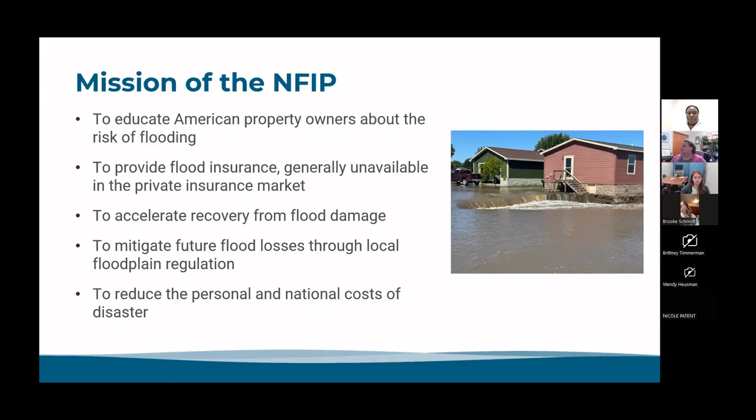So why do communities participate? Firstly, flood insurance, as I mentioned, is required when a structure with a federally backed mortgage or loan is in an identified floodplain, which can be difficult to find through private insurance. The insurance available through the NFIP is at a discounted rate. It can be found almost anywhere in the country, and it's easy to pay out because it's federal money.

Even if you have a bunch of claims, especially when a flood happens, it usually affects a lot of people, and private insurers are unable to pay out those claims. But for the NFIP, because it's federal money, they're usually able to pay out. There's also decreased liability, since an active floodplain management program reduces risk to life and property, and then also flood mitigation.

By mitigating flood damages before an event occurs, your community can recover faster after an event. That's the purpose of the regulations in your ordinance. So if a new structure is coming up, it has to follow the regulations to make sure that structure is mitigated against flood damages.

And then there's federal disaster assistance: communities not taking steps to protect their infrastructure and future development may not qualify for certain forms of federal disaster assistance, because again, they want to make sure that structures at risk are protected. If you're not enforcing those regulations, then you will not have access to federal disaster assistance.

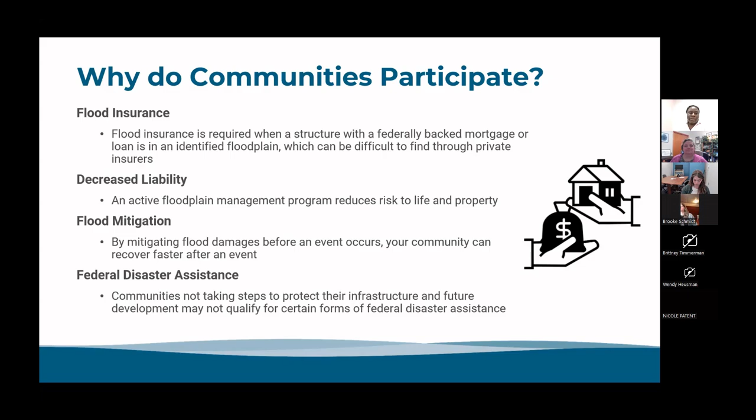So what is a floodplain administrator? I'm sorry.

The floodplain administrator is the individual in a community tasked with implementing the floodplain management program. So most of you have this role. It is an assigned title within the local ordinance. It can be assigned to any recognized position within a community. So you may be a floodplain administrator, but you're also a clerk. You may be a zoning administrator, emergency manager, planner, etc. It may also be contracted to an external person or group.

No minimum training is required to be an FPA in Nebraska. So the only training that you usually get is through the classes that we provide here at the agency. Or if you would like, some go ahead and get the CFM, which is a test that you take to become a certified floodplain manager. But that's usually not required unless your ordinance or your community requires it for that role.

So the floodplain administrator acts as the community representative for all things floodplain. This includes acting as the floodplain permitting officer, the ordinance enforcement officer. The enforcement authority lies within the community. Whenever a floodplain administrator signs a permit, that becomes the official permit, and so the enforcement authority is on the community. We at the agency do not have any enforcement authority.

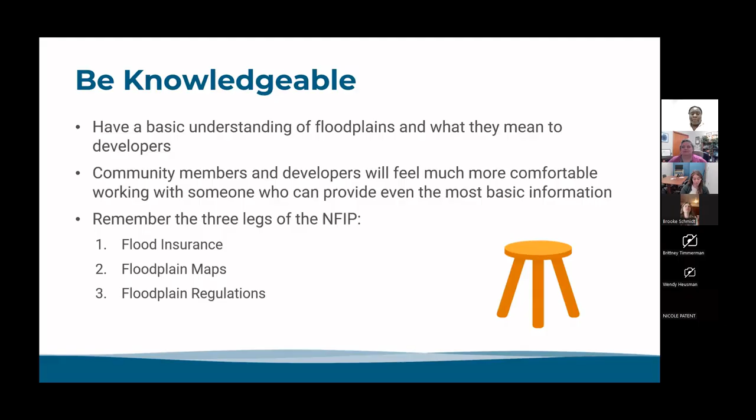So as long as you at least know a bit of this, or you know who to go to ask, then you're on the right track. But it's always a good way to

Be knowledgeable in that way. You can also know your community. Communicate with community members within properties in the floodplain. Remind them that flood insurance is available. Provide your contact information and always be available for questions. There'll always be a lot of questions about floodplains because people still do not understand what floodplains are. So you are the local contact person that they can learn about these things. Talk with your community members about their experiences too.

Next is know your responsibility. Review your floodplain ordinance. If you do not know where your floodplain ordinance is, or you do not have it, you can always contact us and we'll either help you track it down or help you draft a new one. Your local floodplain ordinance has got all the regulations needed to administer your floodplain management program. It also highlights the permitting section. It lets you know how to build, design, and all that. It also lets you know if you've got higher standards or anything associated with floodplain management. So you don't necessarily have to know the entire ordinance, but at least know the permitting sections and what your responsibilities are, which are all laid out in your floodplain ordinance.

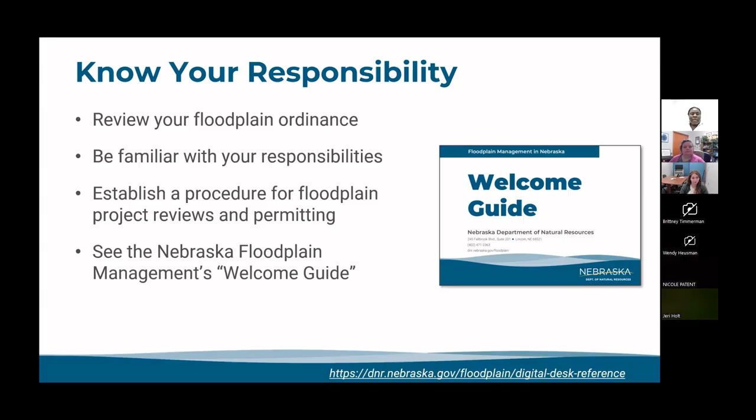Secondly is know your floodplain. Be familiar with your community floodplain maps. A great way to do this is using our online interactive maps or your flood insurance rate maps. The interactive maps can be found at our website, and there should be a link here somewhere where you can click on it and get to the interactive map. You put in an address and you're able to see where your floodplains are.

Or you can use the flood insurance rate maps, which are the FIRMs. You can find these at the FEMA Map Service Center. You can also download them and have them as copies in your office. Know what houses and businesses exist within the floodplain. That's a good way, and this also helps when you have a disaster, so you know how to go about the substantial damage and substantial improvement assessments.

Learn about past flooding events within your community. Again, the resources are the interactive map, the FEMA Map Service Center, and the State Flood Hazard Mitigation Plan for info on past flooding events. All this can be found at our website.

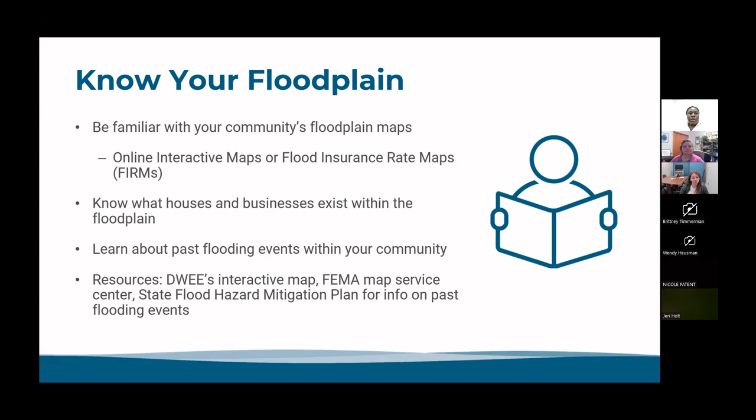And then we're going to go into types of floodplains. There are many types of floodplains representing different flood risks. When you open the interactive map, this picture here is basically what you see, depending on the level of regulations that your community has. The zones are identified by letters and numbers, from zone A to zone A99 to zone X. Some are regulatory, others simply indicate risk.

High risk are the regulatory ones, which are zone A, zone AE, zone A1 to 30, and zone A99. And then you have moderate to low risk—these are shaded zone X and zone B and C. I'm going to go into details on all of this in the coming slides.

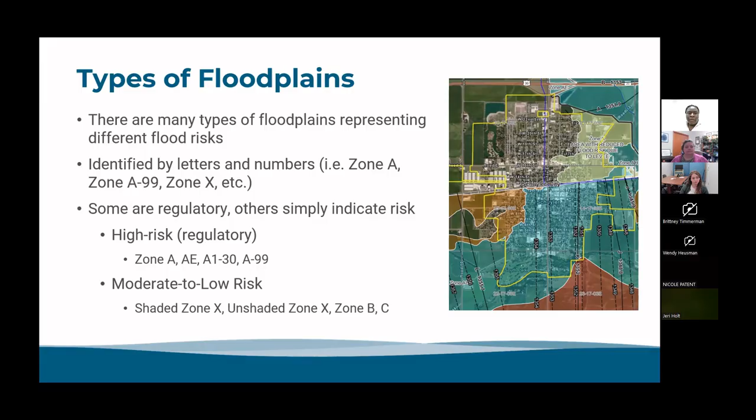The easiest way to find a floodplain in your community is to explore the Nebraska Floodplain Interactive Map. There is the link to the interactive map, and that is what you will see when you go to that interface—this is probably the first page. You have the blue blob, which is the regulatory floodplain, and then you have the community boundaries, which are usually in yellow, and if you have a floodway, that will be in red, and this yellow box is usually if you have a BFE determination in that section.

So yeah, our interactive map is very helpful. We've done a class on this. If you go on a training page, you'll be able to find that class there, and it will help you navigate the interactive map.

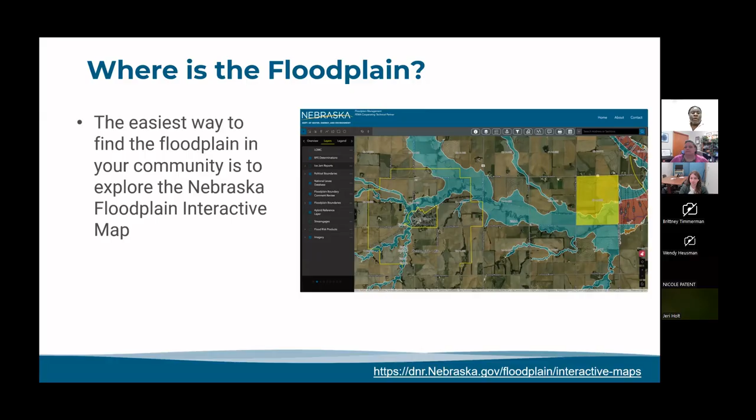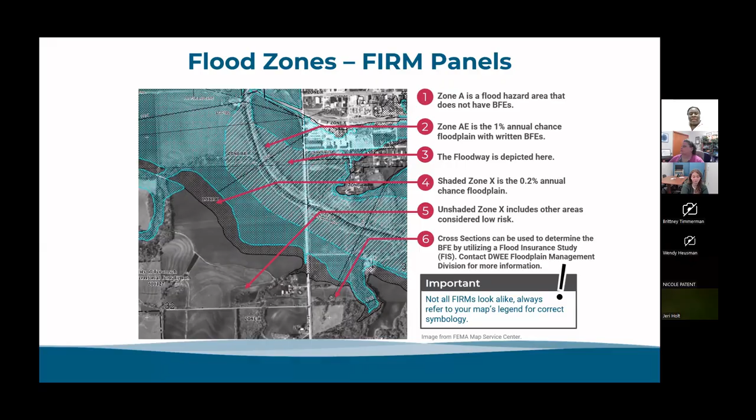And then Zone AE is the 1% annual chance floodplain with written BFE. So where arrow number 2 is pointing, that is Zone AE. Zone AE and Zone A really look alike most of the time because they're all blue blobs, so you have to look at the actual writing to tell if it's Zone A or Zone AE.

Arrow number 4 is the shaded Zone X, which is the 0.2% annual chance floodplain. And then arrow number 5, that will be the unshaded Zone X, which includes other areas considered low risk.

And then finally, arrow number 6 points to the cross sections. That's how they will look like on your interactive map, and this can be used to determine the BFE by utilizing a flood insurance study.

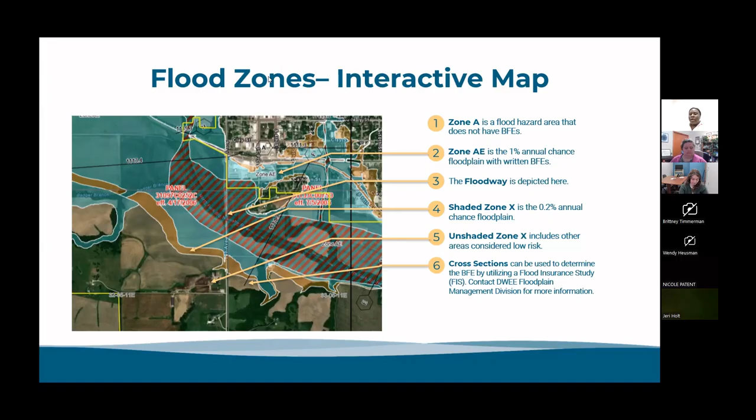Next is being understanding. A floodplain permit is likely not the only document that they're working through to complete the project. As we all know, when somebody is doing a building project, there's a lot of parts going through and they're trying to figure everything else out. So be understanding that they are probably already in a stressful situation. And regulations are really, really hard to understand, especially if that's the first time you're hearing about them. So approach it with an understanding view.

Be available, and if needed, let them vent. Sometimes people are really not mad at you or upset with you. They just really want somebody to listen to them, and you can be that person for them and let them vent, let them tell you what they're going through.

And then you can also use our office or FEMA as the bad guy. You can be like, hey, these are not my regulations, these are the FEMA regulations. We just have to follow them, and this is what they provide for us. So we're always good to be used as the bad guy. You can always use us. And remember, we provide technical assistance, but we are not an enforcement authority for your community. All the enforcement comes through your office, and we only provide technical assistance.

So difficult situations can mean a few things. It can be meeting project timelines, extra financial expenses for floodplain compliance, general unfamiliarity with floodplain regulations, and for some, understanding the regulations may not necessarily mean they plan to meet them. So this is the basic understanding of what a difficult situation would be for a floodplain administrator.

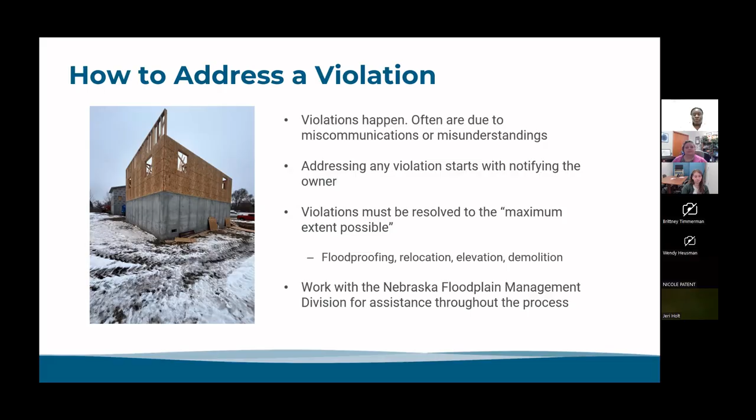But if there is no communication and it's quiet and nobody's doing anything, that's when we move that violation up to FEMA, and they have enforcement authority. And so that is not what you want. So what you want is to work with us so that you can help your community member solve that violation, and that it's brought into full or partial compliance.

If the owner is the problem, inform the owner of the violation through an official notice on community letterhead. So we do have templates of this here.

And so if you need to use a notice, which is the last stage, after you've tried talking to them, after you've maybe given them a call, especially for small communities, if you know the person, just give them a call and say, hey, we need to get this done. Because sometimes when you just send a violation notice, people go on the defense already because that's official, and they're like, oh, well, I'm going to have to inform lawyers and things like that. So sometimes a violation may get out of hand when it really doesn't need to. Sometimes what a violation needs is, hey, we just need you to sign a permit, or we just need to permit this.

Or for example, there was one person that had a shed in the floodplain, and they didn't really know about the regulations, but it was considered an accessory structure, and so they needed to have flood vents in it. And so it's a structure that's already done, it's already been put in place, and we're telling them, hey, you have to make this compliant by putting holes in it. And so if that community had just sent a notice letter letting them know about that, they would have been on the defense. But all they actually needed to do was just put the flood vents in there, and the person already even had the flood vents. They just didn't want to put them in because they didn't look nice. And so it wasn't even an issue of, hey, this is a big violation, just, hey, we need you to get this in. And it was a matter of a day and they got those in.

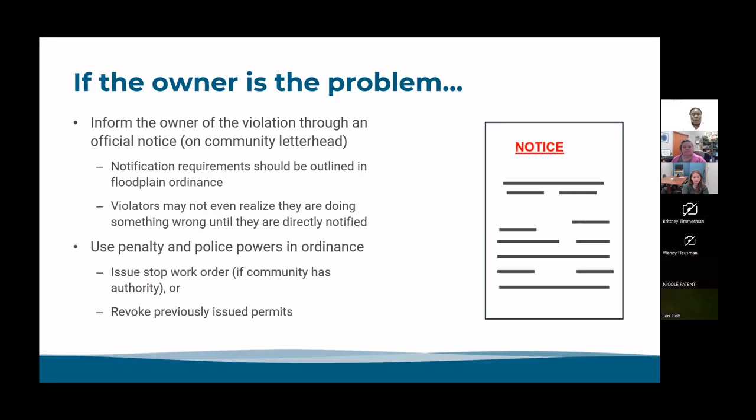Violation notices should include a description of the development, an explanation for why it is a violation, references to the regulations the development is in violation of, and then next actionable steps. This is a really good way to get a violation done if you have next actionable steps. Like I mentioned, having an action list is really good. You keep a copy, they keep a copy, you can send us a copy so that we know and we can track progress like that. And once they start checking those things off, it seems a little bit easier to do than having this huge violation in front of them.

A time frame for response is usually really good so that you can do check-ins and updates. So maybe you tell them, hey, let's do this in 3 months, and I'll check in every month to see if you've gotten things in order. Do you have the permit? Have you done this or that? Have you had surveyed elevations and things like that? So having a time frame is usually really good.

If your entity is at fault, so if the problem is with your office, the community must notify the owner of the violation. So let them know, most preferably call them before you send a notification letter. Discuss remedial actions with the owner. Let them know what they need to do and how they can do it if they don't know how to do it. If you have any questions, you can always call our office and we would help you navigate through that. Explore all practicable remedies. So don't just tell them it's a violation. Let them know what they can do to remedy these actions.

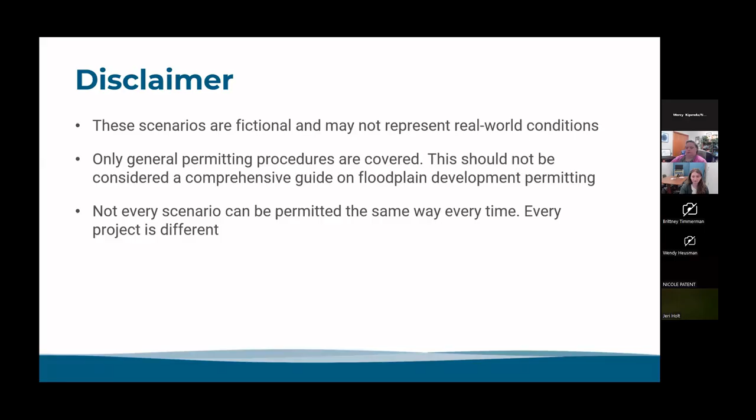To give an overview of the general permitting process and its steps: step one is the project proposal, where the applicant or property owner brings the project to you. Step two is the floodplain development permit application, where they fill out their portion. Step three is the floodplain administrator review of the application, where you check all the information. Step four is where you make a decision.

The FPA makes a decision on the permit. Step five is project monitoring, making sure they're not doing anything outside the scope of the permit and still staying in compliance. Step six is post-construction proof of compliance. We'll go into that in more detail, but those are the general steps of the permitting process.

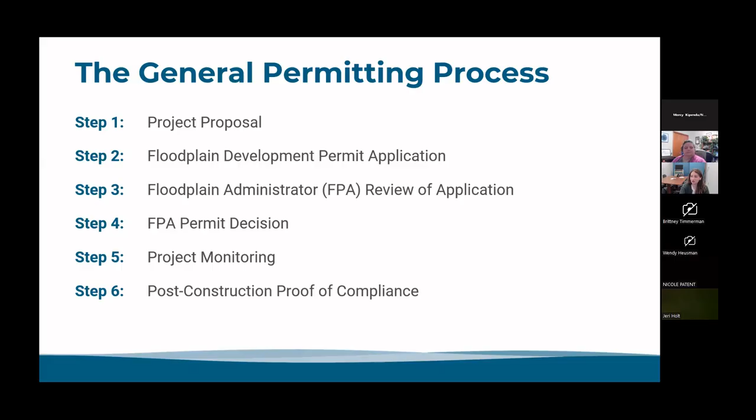So scenario one, also step one, project proposal. A property owner submits a floodplain development permit application to the local floodplain administrator proposing construction of a single-family residential structure on a parcel they own. The proposed structure is a two-story wood frame home with an attached garage. This is probably unrealistic to a lot of you, as most people don't just bring floodplain permit applications to you right away.

Typically, especially within smaller communities, they will apply for a building permit, and through that you find out they're in the floodplain and need the permit. But this is an ideal world scenario where they are already aware of the floodplain development permit and submit an application to you.

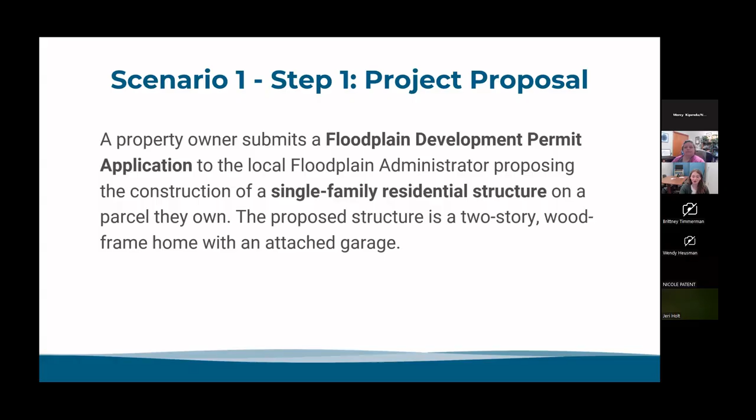So step two is that permit application. You want to read through the entire application. As you can see, we're using our model permit for this scenario and all the other scenarios. Yours might look different, but we wanted to use our model as we think it creates a good process and lays out all the information you need.

Once you have the location, which is on 123 Range Street, you will go to either your FIRM panel, or probably easier, our floodplain interactive map viewer, just to make sure you know what zone it's in, and that they're doing everything correctly. This blends into the review of the application. Here you can see the location of the project, that red pin on the image. You'll want to note the flood zone — it is a Zone A. So this should start getting your gears turning, thinking about what is required for residential structures in A zones.

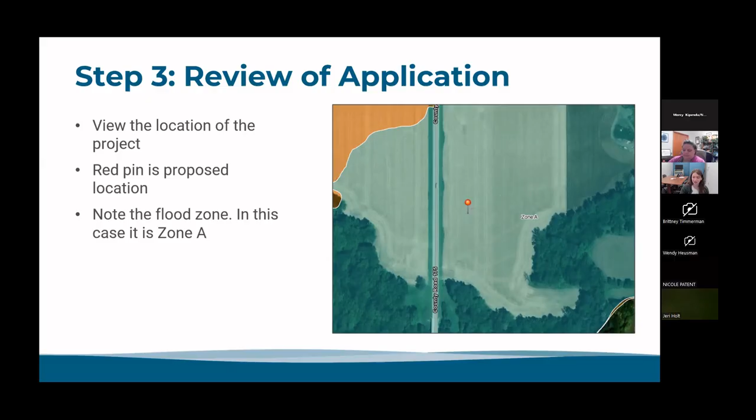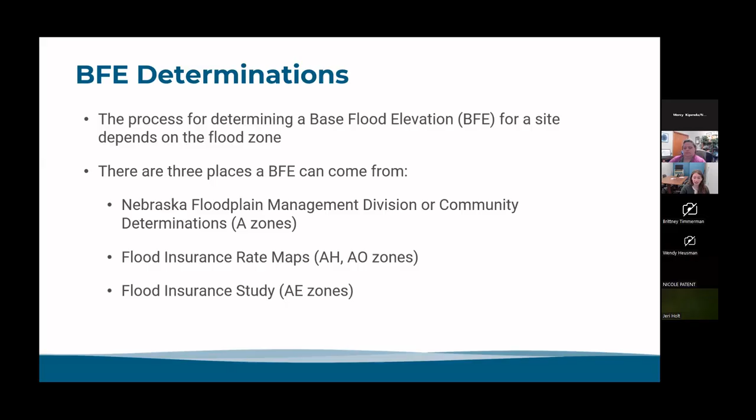One of those things is a BFE determination, a base flood elevation. The process for determining a BFE for a site depends on the flood zone. As noted, ours was Zone A, but there are three places a BFE can come from: us, the Nebraska Floodplain Management Division, or a community determination, which applies to A zones; from flood insurance rate maps for AH and AO zones, which will say however many feet above the grade; and flood insurance studies, which are for AE zones with floodways.

So again, we noted it as an A zone, so we contacted the Nebraska Department of Water, Energy, and Environment, Floodplain Management Division, and got our BFE determination, which is on the right there.

You'll see there's a bunch of little wavy lines, which are essentially cross sections. You will find the location of the project and check what two numbers are around the project, since typically a line doesn't run right through your project.

In our example here, the elevations are 1322 and 1321. When it comes to this A zone development, you will always go with the higher number as the BFE, since you can't interpolate between the two numbers. You can't say, well, that looks about halfway, so it's probably 1321.5. You don't do that when you're doing A zone BFE determinations. So you'll just go with the whole number of 1322 as the BFE.

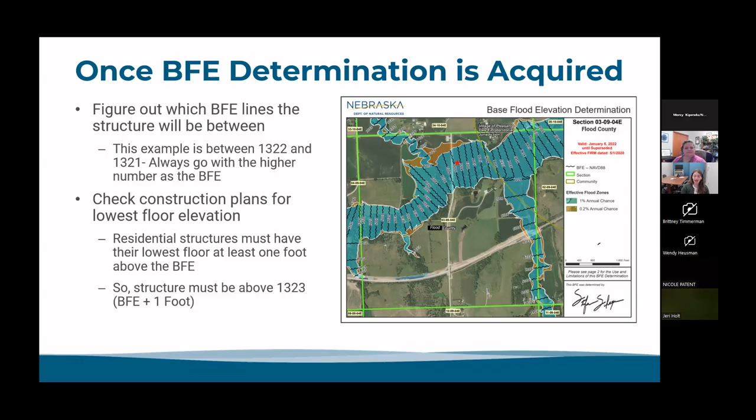So after you have that BFE, you'll want to check construction plans for the lowest floor elevation, because as a Nebraska state standard, residential structures must have their lowest floor at least 1 foot above the BFE. So that lowest floor for our proposed structure must be at or above 1323.

There's other required documentation for A zone development. A less than 1 foot rise determination is needed. This doesn't have to be an entire hydrological analysis by an engineer, but it could be if you want to require that. It's up to you on how in depth this less than 1 foot rise should be. This just means that the proposed construction won't cause 1 foot of rise in the base flood anywhere within the floodplain, not just the immediate surrounding area, but the entire floodplain.

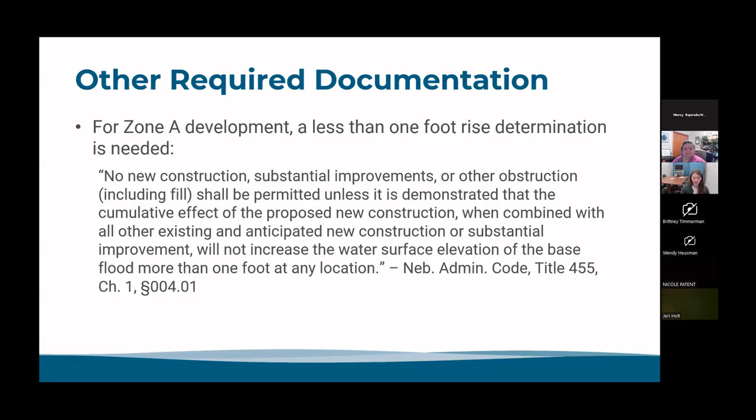So we'll move into and continue with our floodplain administrator review. You'll want to fill in part D of our model floodplain permit. They're split into 2 parts if you've looked over the permit before, and this is to be completed by you, the FPA. You'll fill in the information to the best of your ability, using that information given back in the first sections A, B, and C that were filled out by the applicant. You'll use whatever they give you to fill out the information here.

If anything is missing, we also have a sample model request for information form that you can use to tell the applicant what they need to provide. It's just a list of all the potential documents that one would need for floodplain development permitting. You'll just check off what they're missing, explain it, write a little note if you'd like to, and then give that back to them so that they have a written copy of something tangible showing exactly what they're missing and what is required to continue on with the project.

So going through our review, first thing is the flood zone. We know it is flood zone A, so fill that in. Base flood elevation, which we already determined was 1322, came from the Nebraska Floodplain Division. The required flood protection elevation is that BFE plus 1 foot, the freeboard amount. So 1323 is what the lowest floor needs to be built to. Those are just the general floodplain information.

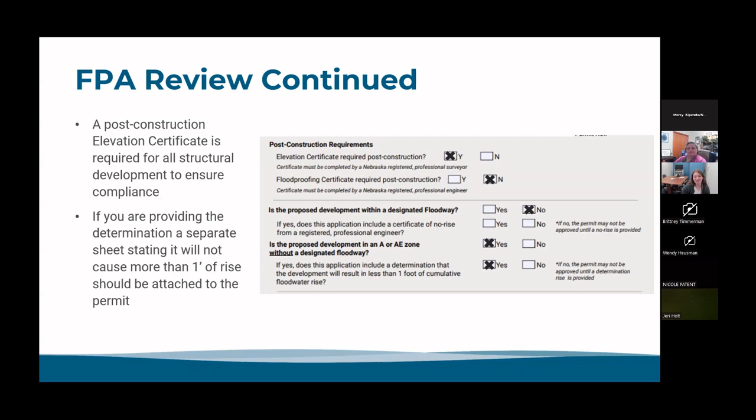If yes, does this application include a determination that the development will result in less than 1 foot of cumulative floodwater rise? That's what we discussed before, that you don't need a total engineering analysis to do this, but there should be some kind of determination. If you, the community, are providing that determination, you should write that out in a letter on your official letterhead, sign off on it, and attach that to the permit and keep it with it. It's important that this should all be documented together. So we'd say yes, because I didn't make a sample determination, but we'll just say yes, that they did obtain one.

Continuing on to this last section of the floodplain development permit, these are just requirements of all developments in all flood zones. There's no specific language or specific requirements more than what we've written out here from the Code of Federal Regulations. So hopefully it should be yes, but generally: is it anchored? Materials and equipment resistant to flooding, minimizing flood damage, adequate drainage, having all of your electrical components and utilities designed to prevent entry of floodwater, and materials that are buoyant, flammable, explosive, or could be injurious to human, animal, or plant life. Not applicable here - that's typically for storage of materials.

So then here we would - this is really the super helpful section to pay attention to - this is the required submittal documents. You want to check in everything that they do need to properly permit this development. So you'd want that completed application, a location map with the floodplain shown, a site plan, construction specifications showing that lowest floor elevation, and a less than 1 foot rise determination.

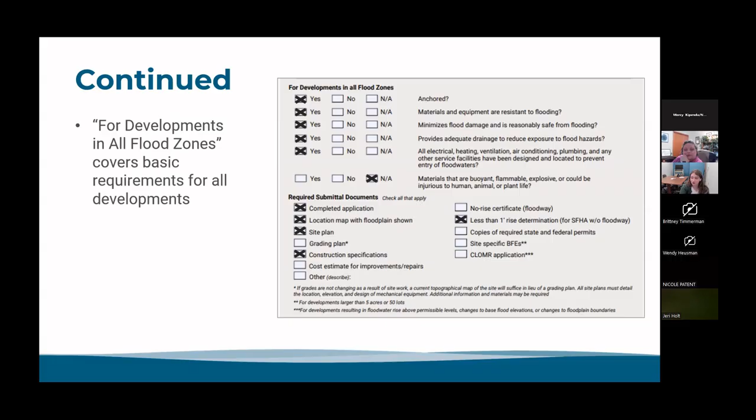So after we have received all of that information, then it is time for the FPA to make the permit decision. You will approve it, require more information with our model RFI sheet, or you'll deny it because they're missing something or it's not possible to be created in the floodplain. If you'd like, you can choose to set an expiration date for the permit - not required, but you can choose to do that if you'd like or if your community requires it. But something to note: if work does not begin within 180 days of the permit issuance, it is considered void and they will need to apply for a new permit.

This is for all floodplain development permits. This is part of the NFIP, a general rule that for any floodplain development, if it's not started within 180 days, they've got to apply for a new permit. This is just to ensure people aren't holding on to permits from 5 years ago and then trying to bring them back and say, well, you permitted this 5 years ago and I'm just now getting around to it. No - conditions might have changed. Let's redo this.

So steps 5 and 6: project monitoring and post-construction proof of compliance. After a permit has been approved, you should continue to monitor the project. Just do like a drive-by inspection, make sure they're not putting up a huge apartment building where you permitted the house or anything crazy like that. But once the project is complete, finished elevations for the house are required to ensure it was built to at least 1 foot above the BFE.

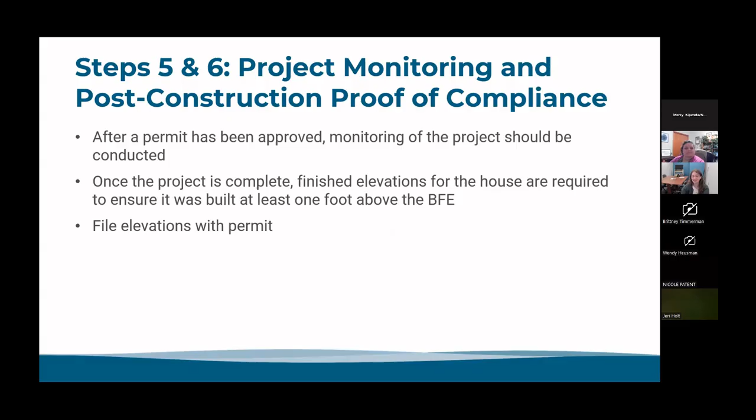This doesn't have to be that elevation certificate from FEMA, but that is the recommended way to have these elevations provided, as it covers any of the requirements you would need for proof of compliance. So it's just recommended, but not necessarily required to provide the elevations in that form. Once you get that post-construction proof of compliance, you will file that with the permit and keep it all together in your records indefinitely. Don't ever get rid of your permits, as they are required to be kept forever, basically.

So moving into our second scenario, with our first step, project proposal. A property owner owns a single-family residential structure constructed in 1978 within a Zone AE. They're proposing major improvements to the home, including remodeling the kitchen and 2 bathrooms and replacing outdated electrical and plumbing. So pretty major project going on here. We'll first look at this floodplain development permit submitted by Trisha Floodplain. The address is 781 Riverfront Drive. Looks like she filled it out pretty well - they're remodeling kitchen and bathrooms.

They correctly marked that it's an existing structure and that alterations are being made to it, and that it has an above ground crawl space. They even listed the total square footage of enclosed space as 800 square feet. It's important to note this was built in 1978.

This structure is considered grandfathered, meaning it was built before floodplain regulations, and this allows a residential structure in a Zone AE without any modifications needing to be made to it. So because they are altering an existing structure, you will need a substantial improvement assessment.

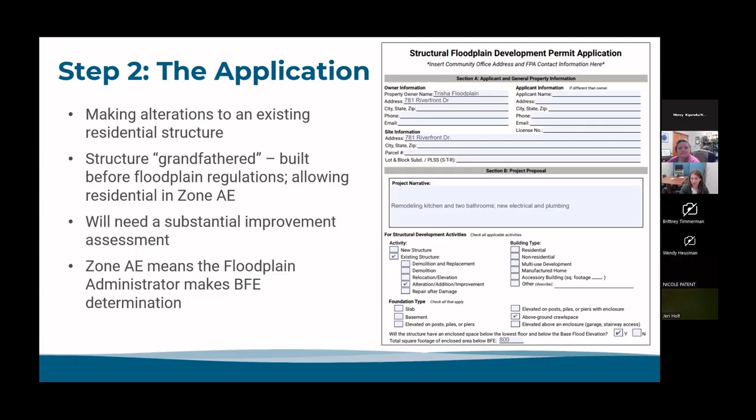As we also just discussed, Zone AE means the floodplain administrator will make the BFE determination using the flood insurance study. So we'll review the application as we did before. You'll look up the address on the map and see that it is an AE zone.

The BFE will be determined by the FPA using the flood insurance study. We won't walk through that process in this class due to it being kind of lengthy in its own thing, as Mercy mentioned earlier. But we do have recorded trainings to teach you how to calculate it if you'd like to do that, or we're always happy to help you guys if you want to reach out to us individually, and we can walk through that process with you over our own call.

So we did that process. We found using the FIS that the base flood elevation is 1289. And so you'll have the flood protection elevation would be that 1 foot above, standard across Nebraska, 1290, unless your community has it even higher.

And then we move into that residential structure requirements: 1290 lowest floor, an enclosed area below the lowest floor and below BFE. Remember they said they had crawl space, so they'd say yes, there was one, and that it is 800 square feet. That requirement is 1 square inch of vent opening per square foot of enclosed space.

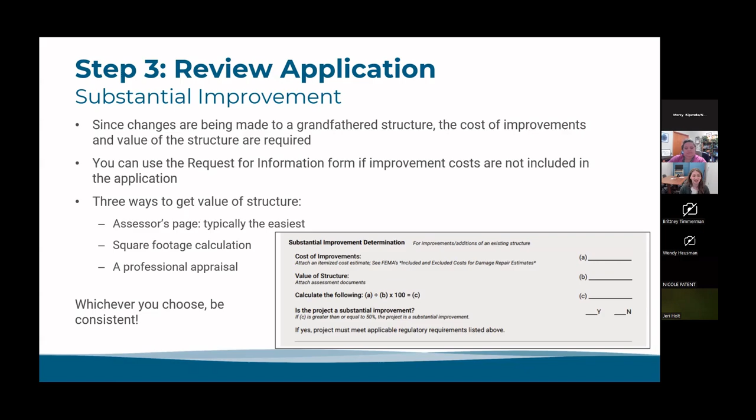Be consistent. Don't just choose the assessor's page for this one and then go with a square footage calculation for the next person that needs a substantial improvement calculation. We just like you to keep it consistent across your program.

So because of that substantial improvement, the entire structure will need to be brought into compliance. This includes raising the lowest floor and everything with the structure at least 1 foot above the base flood elevation, floodproofing those utilities or elevating them, and properly venting enclosures below the 1 foot above base flood elevation.

Again, they have that crawl space, so they will need to make sure that venting is being done correctly. You can use the elevation certificate to check the existing structure for elevation of lowest floor and the venting, because maybe it turns out it just so happened to be built above the base flood elevation. That's why it's important to get those elevations before any construction starts or mitigation actions are taken.

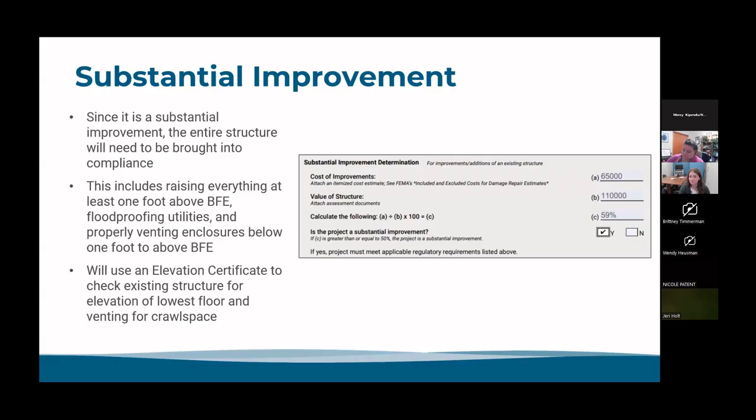So now that we've figured out that yes, it is a substantial improvement, we'll continue on with our review. Again, we'll need that elevation certificate required to verify the structure is above the BFE. The floodproofing certificate required for enclosures below the BFE to be verified, and we'll need a less than 1 foot rise determination, such as we discussed before.

And in this case, by floodproofing certificate, that would be referencing the need for flood vents in the crawl space to be certified to meet requirements in the ordinance.

So if they're just simply cutting open holes into those walls and leaving them as is, then you, the FPA, would just need to go to the site, measure and check that they have 800 square inches total of openings, and that it counts as the floodproofing certificate. But if they're using something like smart vents, ones that open when there is water infiltration...

Then you'll need an engineering certificate that states that they follow all the proper requirements. Typically, if you purchase these engineered vents, they come with a certificate when you purchase them. So that just needs to be given to the floodplain administrator and kept on file.

Oh sorry, I didn't walk through this. So yes, we'll need the elevation certificate, the floodproofing certificate. Then we'll move into, is the proposed development within a designated floodway? That'd be no, because it's just a zone AE. So we'd say yes there.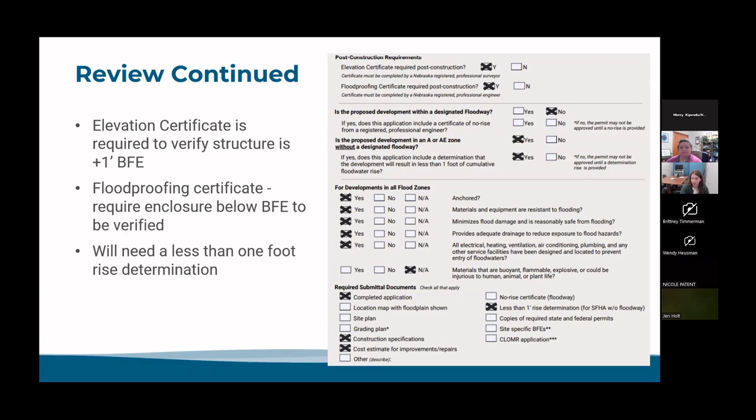So then this moves into the permit decision. You'll decide to approve, deny, or request more information.

So then making our decision on the permit, we will monitor and require post-construction proof of compliance. Same thing as last time, making sure they're not doing anything crazy. And then you'll want to ensure that elevation certificate is received after construction to verify that they have brought that grandfathered structure into compliance with current NFIP standards.

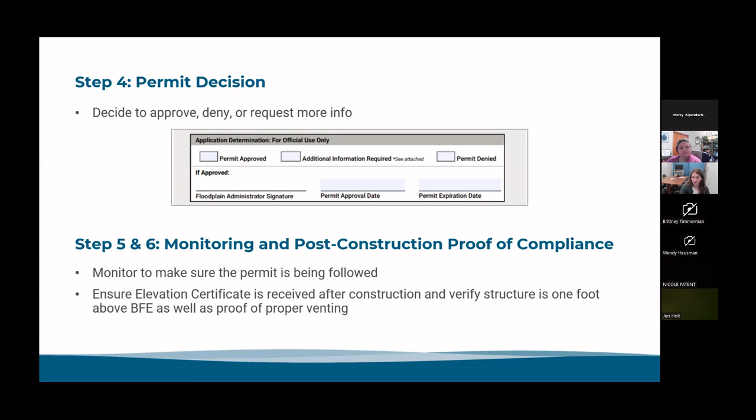All right, scenario number 3. A newly appointed floodplain administrator is conducting a routine review of properties within the community's floodplain. They discover an existing non-compliant shed located in an A zone of the SFHA. Further investigation reveals that the shed was constructed a year ago and was never properly permitted by the previous FPA. The property owner claims they were unaware of floodplain regulations.

So if you've ever had a CAV with our department, you're probably familiar with this. This happens more than we'd like it to. But it's not the end of the world if this happens. That's why we're walking through this. There are steps to go back through and make sure these are properly brought into compliance with the NFIP.

So the first steps will be getting a floodplain development permit. You'll have the owner start a permit. In cases such as these, permits can be issued after the fact if they are being compliant with the floodplain regulations. This isn't just, I discovered this thing happened in the floodplain, I'm just going to write them a permit. No, you still need to go through all the proper permitting documentation and steps.

It's just happening after the fact, because either it's the FPA's fault, or the person tried to sweep it under the rug and get by without it. But so yeah, they can technically be back-permitted in these cases.

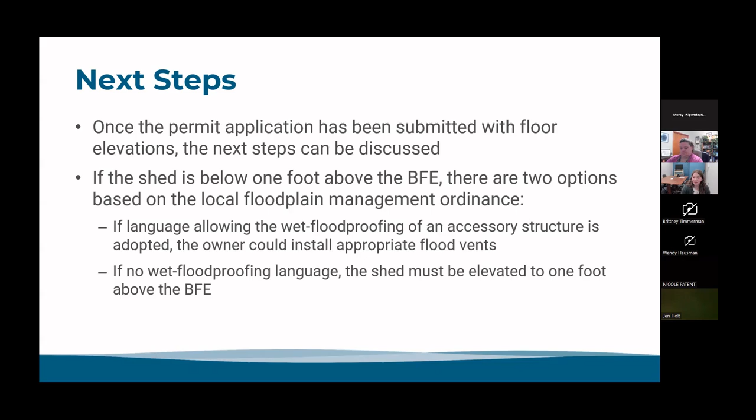If language allowing the wet floodproofing of an accessory structure is adopted within your ordinance, then the owner could install appropriate flood vents or flood openings. But if you don't have that wet floodproofing language adopted, then the shed must be elevated to 1 foot above the BFE.

The final steps for this are, after deciding the mitigation action and the rest of the permit is complete and correct - all those steps we walked through before, the less than 1 foot rise determination, etc. - then a decision can be made to approve or deny the permit. And then once the shed has been elevated or those vents installed, you'll need the post-construction proof of compliance: either the elevation certificate or the flood vent requirements, the engineering certificate, or the measured amount of openings.

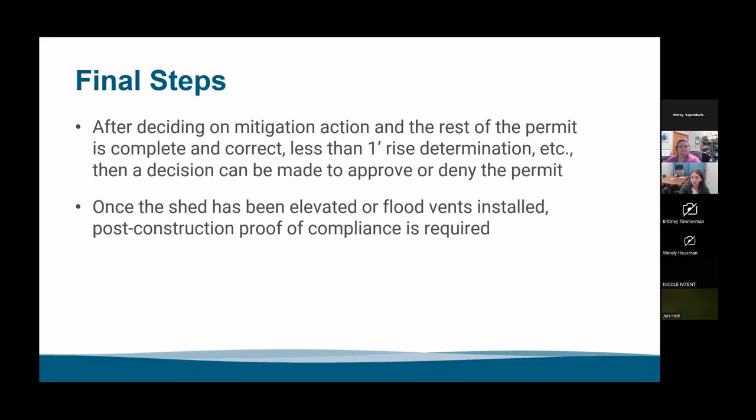Moving into scenario number 4. A property owner wants to build a house on an empty lot. When the building permit application is reviewed by the FPA, they notice that the site location is not in the regulatory floodplain right now, but will soon be once the new maps are released in the future. So you can see on that picture on the left, out of the floodplain, they should be good.

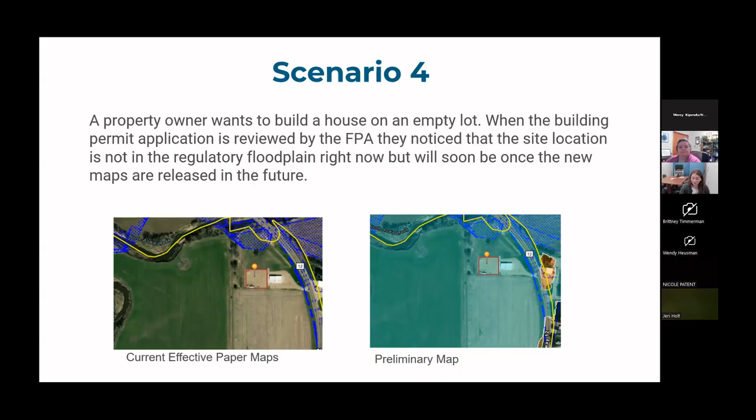But we do display preliminary boundaries on our map. And so you can see that in a few years' time, when those maps do become effective, that property will be located within the floodplain. So what should you do here? You'll want to start and just have a conversation with the property owner. Let them know about the maps and the situation and how that could affect the development.

If they're planning to build a structure with a federally backed mortgage or loan, then they'll have to have that flood insurance requirement. Or if they build something now, they'll have the grandfathered status on that structure, and substantial improvement and damage requirements will apply to it. So it's just really important to take these things into consideration. So maybe they could change their plans now and already be in compliance with the incoming floodplain regulations.

Of course, we do recommend building to floodplain regulations. That'd probably be the easiest and best way for them to not have to get that mandatory flood insurance. If they're already following those requirements, then they'll be good with their... sorry, lost my train of thought there, but we recommend building to the requirements as it just makes it easier. But if they're interested, you could give them the materials on a letters of map change.

Letters of map change, such as LOMAs or LOMR-Fs, can't be done before the new maps are effective. You can't submit them for preliminary maps, but they could get all the information and required documentation before those maps become effective. And then once they are effective, you could submit those materials and see if you could get a letter of map change from FEMA then.

Moving on to scenario 5. A property owner has a parcel of land that is halfway in the special flood hazard area, and the other half of it is not. They want to build a storage facility in the area that is in the special flood hazard area. The owner claims that all the parcel is out of the floodplain and therefore does not need a floodplain permit.

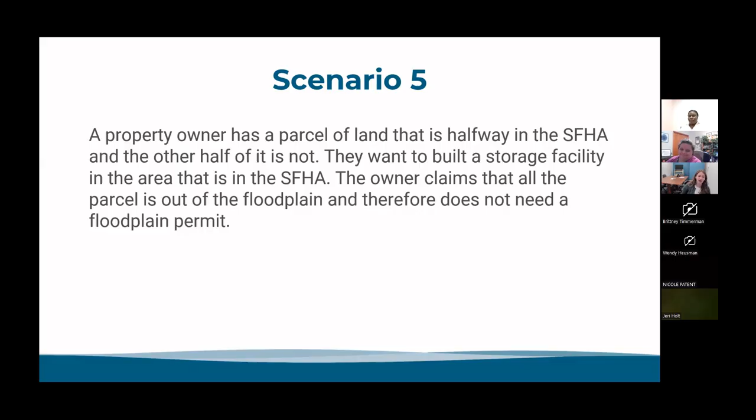So this could kind of tie back into Mercy's half of the presentation on maybe difficult property owners that you're dealing with. This happens to floodplain administrators a lot. The owner says, well, it's never flooded here. It's not in the floodplain. I know that. Well, it doesn't just come down to word of mouth, sadly.

You're not trying to guess where they're going to be doing this construction or trying to line up their site plans and compare it to the floodplain map. It's easier if they just do it themselves and have it all lined up so that you can have very exact information to go off of.

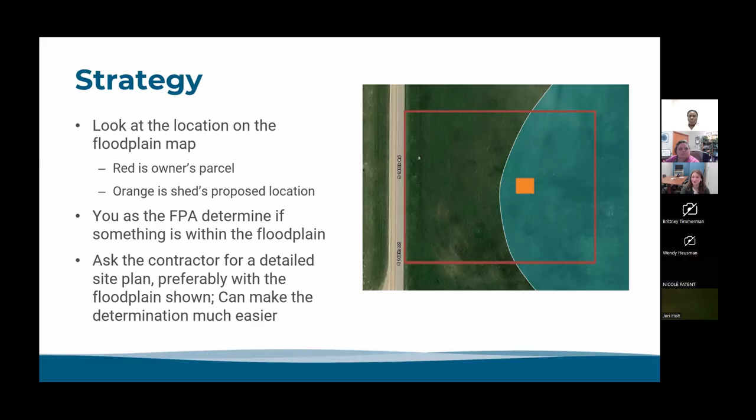So since the location is within the floodplain, the regulatory flood maps, you'll want to talk with that property owner, use the tips Mercy gave earlier on communication, show them the maps, and explain that because it is in the floodplain, a development permit is required, and that they would need to follow the regulations within the floodplain management ordinance.

So you could also suggest that since that parcel is only halfway in the floodplain, they could still build it on that same parcel, but have it outside the floodplain boundary. Then they wouldn't need to have that permit or build to the regulations in the ordinance. So yeah, no permit needed, but that doesn't mean it's absolved of all flood risk. Again, as everyone here probably knows, flood maps are a simulation.

Used under certain conditions. So, building that close to a floodplain boundary, you probably are at a higher risk than something way far away from a floodplain boundary. So just keep that in mind. They'll want to think about that. You'll want to mention to them that there still is some risk of flooding if they choose to build just outside of the boundary.

If they're still really insistent that that's not the floodplain, you can give them, as we talked in the last scenario, information on letter of map change. They could look into a LOMA, or they could bring in fill if they really wanted for the shed and have a LOMR-F, whatever they would like to pursue. But if they do want to go this route, they cannot start their work until the letter of map change has been approved.

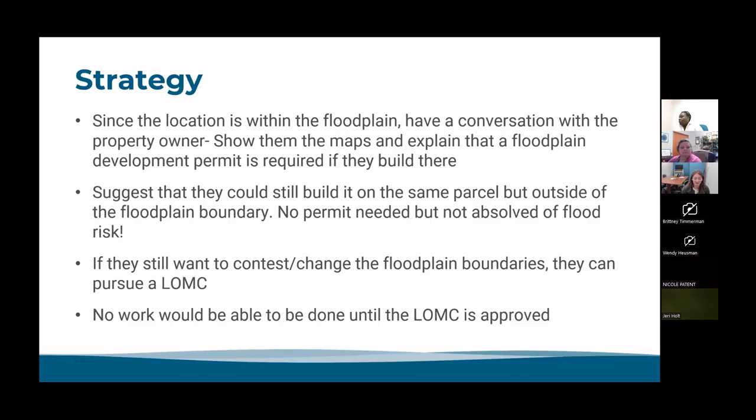So just some general recommendations. Providing an approved permit may not provide clear enough instructions to builders. You might want to consider including a letter detailing exactly what you expect from the permit. It also provides your direct contact information so that they know who to reach out to if they have any questions. You can never provide anybody too much information on floodplain development, since it really differs from scenario to scenario as we've discussed. So just providing them exact information could really help them out and avoid any mistakes being made.

And also, always feel free to engage us at the Floodplain Management Division for help with permit reviews and project proposals. We don't do the permitting for anybody, but we are always happy to look over the permit materials that have been submitted to you and give feedback on, yes, this is compliant, or, oh, they're still missing this piece. We are very happy to do that, along with other project proposals too.